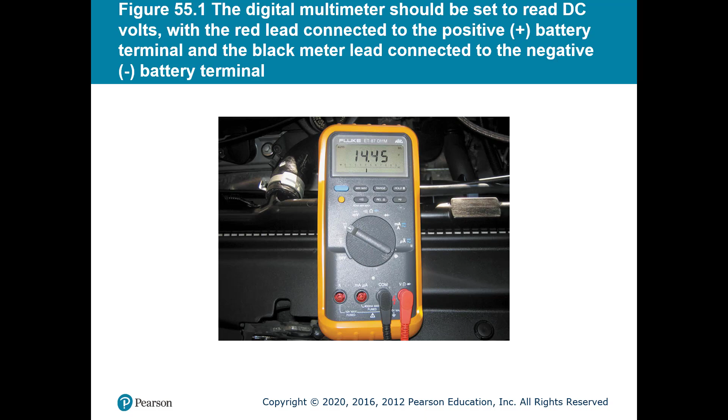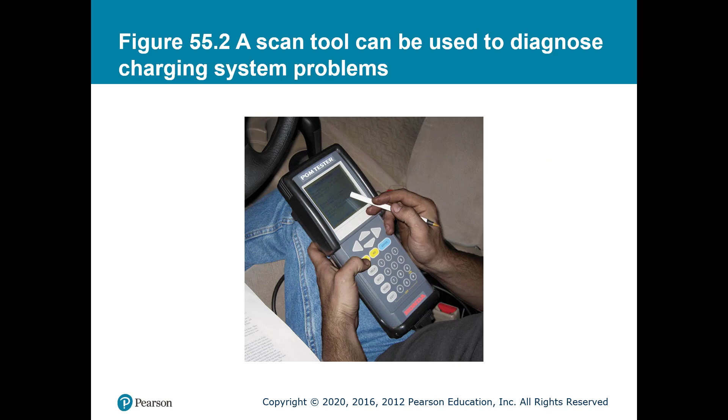So there have been techs in the past that have just simply replaced an alternator because there was lower than expected charging system voltage. But they never checked that the wiring between the B nut or the B terminal and the fuse box was good. So one quick test that you can use is you can attach one lead from your test light to the battery's negative and the probe tip of the test light to the B terminal of the actual alternator to verify if there's light. This is a quick test, very simple, and you cannot underestimate how important it is to check for that. You can also use a multimeter as well. You're basically looking for voltage at that B terminal.

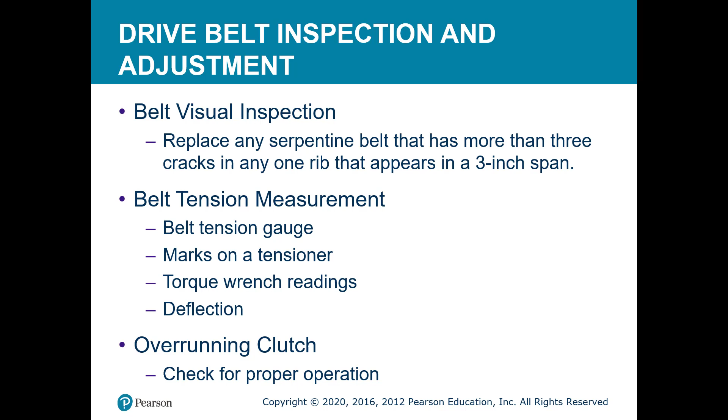And then we'll discuss the overrunning clutch. In the last chapter, we discussed OAPs and OADs as far as the pulleys go, so overrunning alternator pulley and overrunning alternator damper. We'll show an example on how to deal with those as well. Here's an example of a neoprene traditional serpentine belt or accessory drive belt, and you can see there's cracks in it and chunks taken out of it. This is pretty easy to see that this belt is damaged and needs to be replaced.

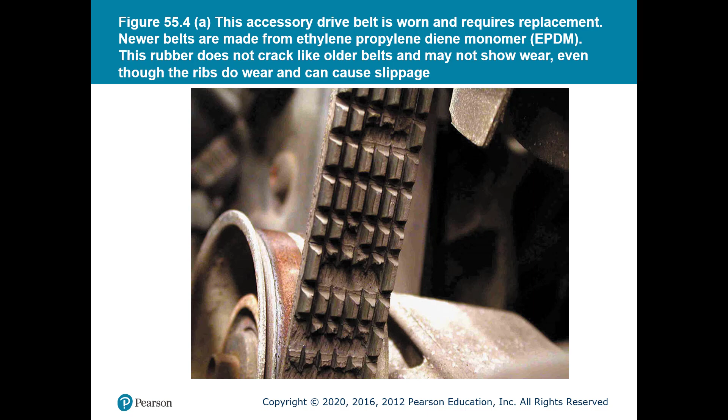However, the newer belts are difficult to tell when they're showing wear, and this is because they don't crack like these older neoprene belts, and I'll show an example here side-to-side in a moment. The newer belts are EPDM, ethylene propylene diene monomer. They don't crack. They may show a glazing, but they don't crack, so it's difficult to just look at it and say it needs to be replaced.

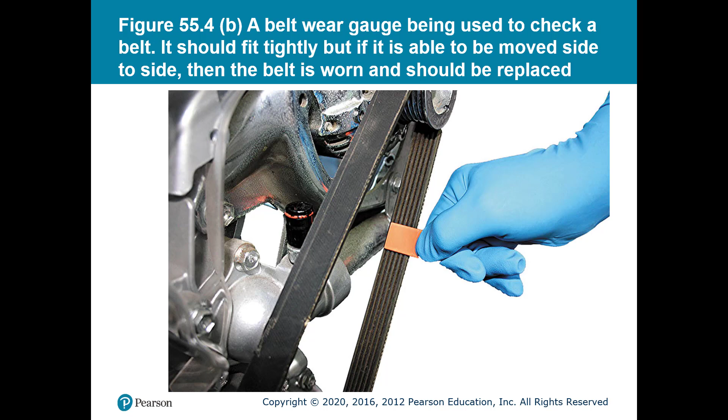One way to tell if an EPDM belt needs to be replaced is to use some type of gauge. And this gauge here in this example is a belt wear gauge. It has little grooves cut into it that drop into and match up with the grooves on the accessory drive belt. The gauge should fit tightly as its grooves should mate perfectly with the grooves in the belt. If it moves side to side, then the belt is worn and should be replaced. Now the example on the left-hand side of this slide shows the EPDM belt, and it shows a different type of gauge.

In this example, you can see how the gauge doesn't sit all the way down into the actual V of the belt, and that means that it's good. In this example on the right, you can see how the gauge actually settles into the belt. That means that it's worn. So that's one way to tell.

And once again, on the right-hand side, this is our neoprene belt with the cracks. Just to refresh, we don't want to see any more than 3 cracks in any one rib that appears in a 3-inch span or section of belt. As stated previously, belt deflection is important. We want to have the ideal tension on our belt.

This can be done many different ways, but the easiest way to do this is with your own fingertips. If you find a section of belt between 2 pulleys that's around about a foot, what I'll do is I'll place my thumb in the very center and I'll depress it. And what we're looking for is about a 1/2 inch of deflection at its widest span, which would be, like I said, a minimum of 1 foot. Greater is even better if you have more than a foot.

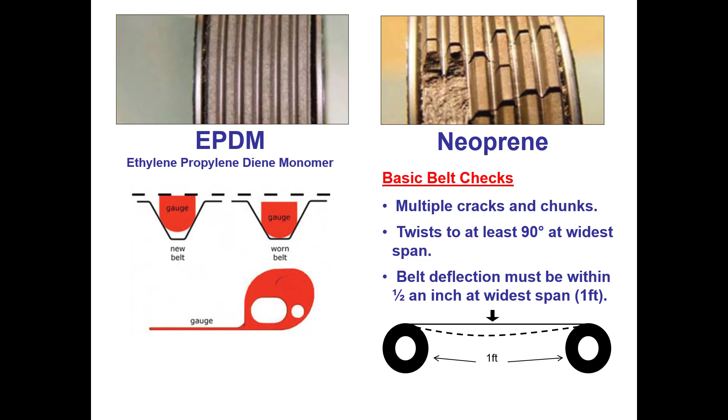The other thing you can do is twist the belt. So if it's a wider belt with many ribs across, if you were to grab the belt and give it a twist, you should be able to get up to about a 90-degree deflection or a 90-degree twist at its widest span. Any more than that, it's too loose. Any less than that, it might be too taut.

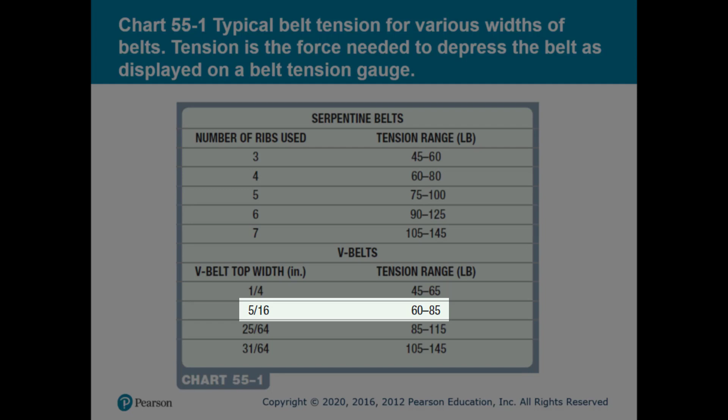This chart actually shows a range of the pounds of tension that can be applied based on the number of ribs for the specific belt. So, for example, if I had a belt with 6 ribs across, I should be able to put a tension of between 90 and 125 pounds at that widest span. And there are certain gauges that can test for that. If I'm using a 5/16" V-belt across the top, I should be able to apply between 60 and 85 pounds at the widest span.

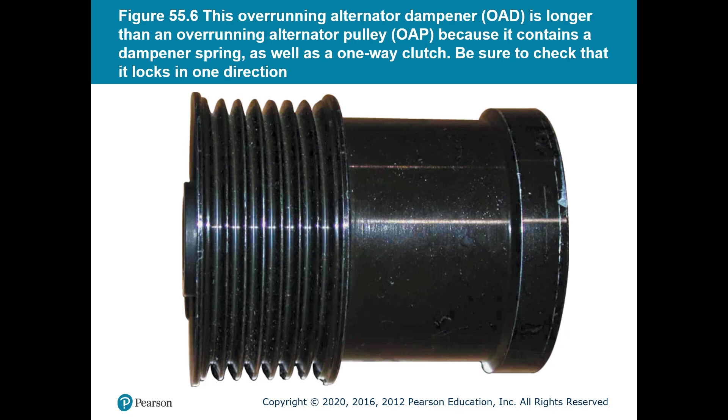A good alternator should produce very little to almost no AC voltage at all, and that's due in large part to the rectifier bridge, where the diodes will actually filter out any AC voltage, as we've discussed in prior lectures. The test we're going to use to verify if there is an acceptable amount of AC coming out of the alternator, which should be very little, is referred to as an AC ripple test.

So the AC ripple voltage has to stay under 400 millivolts. Some testing equipment will trigger an issue if it goes greater than 200 millivolts. You can do a quick AC ripple voltage test with your meter. First, you set your meter to read AC volts, and you want to dial it down to the millivolt scale. You want to start the engine, and you do not want to rev the RPMs any higher than 2,000.

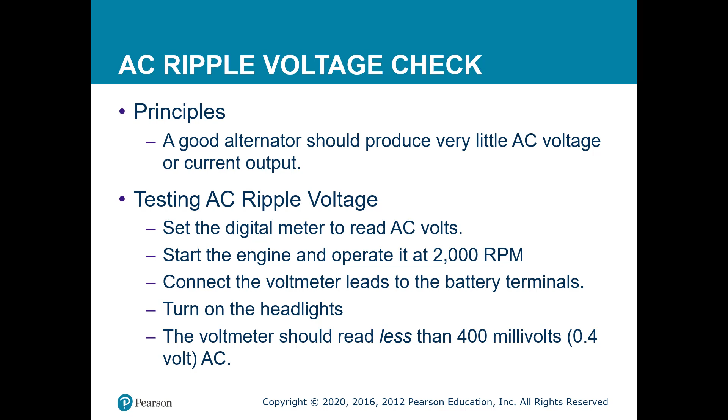You're going to connect the multimeter right to the battery terminals, and you should turn on the headlights to load it up a little bit. And once again, we want to look at the meter, and we want to see something less than 400 millivolts.

If you have an AC ripple that's above 500 millivolts or 0.5 volts, you could potentially have a problem in the diodes themselves. It should be noted that very low battery voltage can trigger an excessive ripple result. This is important to know. So if I have a battery that's dead or discharged and I'm doing this test and I have a high AC ripple, it's probably because I have a battery with low voltage.

And remember, at the beginning of this lecture, I said all of the tests that we want to do when we're testing a charging system, we want to have 75% state of charge or better, or 12.4 volts or higher. So if you notice that you have a high AC ripple and you know that your battery is low in voltage, it would be best to charge that battery up, then do this test again for more accuracy. If you still have a high AC ripple after you've verified that you have a good battery, then you probably do have a problem with the alternator itself or the rectifier bridge specifically within the alternator.

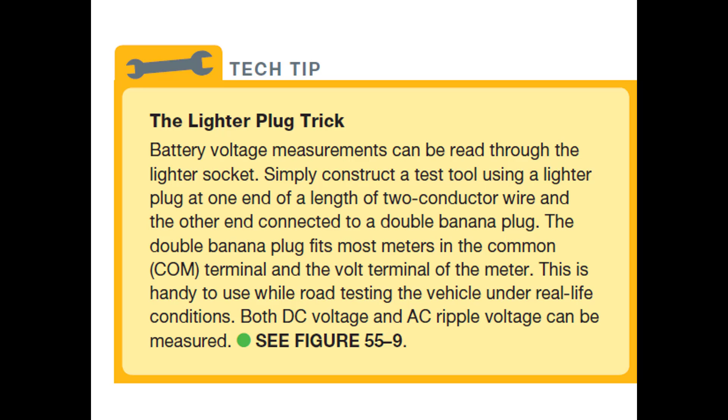We talked about AC ripple voltage, but you can also test for AC ripple current. To do this, you'll need an amp clamp. Several times this semester, I've recommended a small mini amp clamp that is designed just for amperage, an inductive clamp. These work out really well for this test. You want to start the engine and turn on the lights to apply a load. Place the mini amp clamp around either the positive or the negative cable coming from the battery; it doesn't matter which one. Switch the meter to read AC amperes, and then record the reading.

What we're looking for is less than 10% of the specified alternator rating. So if I have a 100 amp alternator putting out up to around 100 amps, I don't want to see any more than 10 amps. In fact, I want to see less than that.

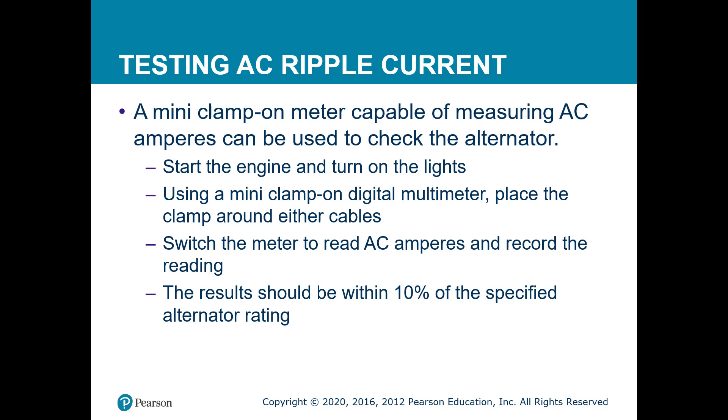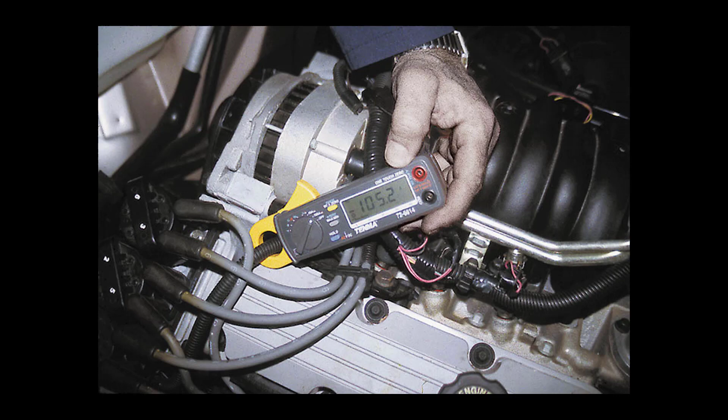Here's an example of that mini amp clamp connected to the wire that comes off of the B-nut. It is strongly recommended that you keep this mini amp clamp away from the physical case of the alternator itself, because it does have a magnetic field inside, and that magnetic field can throw off the inductive clamp. Based on the number here, it shows that my alternator is outputting 105 amps DC. If I were to switch the dial to the AC setting, I shouldn't see any more than 10.5. That would be 10%. In fact, like I said, I want to see less than that.

This concludes the Part 1 lecture for Chapter 55, Charging System Diagnosis and Service. For additional information on this topic, please read this chapter and refer to the PowerPoint found in the Course Content folder.